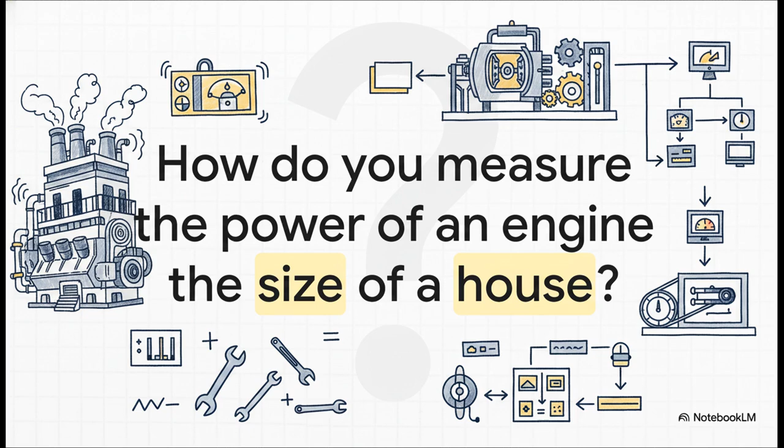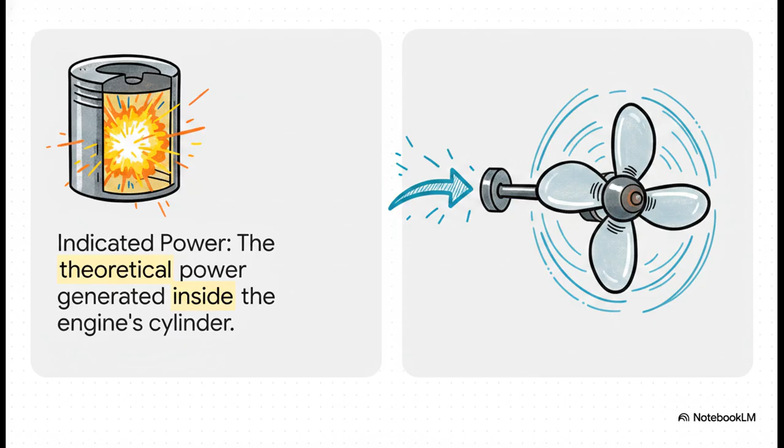Okay, the first thing you have to understand is that an engine's power isn't just one single number. There are two. You've got the theoretical power, the raw energy created by that explosive combustion inside the cylinder. We call that indicated power. But then you've got the actual usable power that makes it all the way to the propeller after fighting against all kinds of friction, and that's the brake power. Our whole mission today is to figure out how to measure both.

So, first up, we have to find a way to peek inside the fiery heart of the engine itself, right into the cylinder where all that power is first born. And to do that, well, we're going to need a very special tool. This right here is the engine indicator.

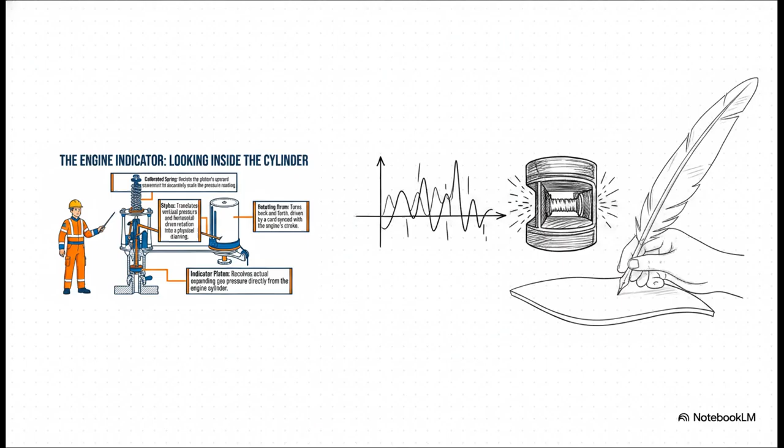I want you to think of it like a mechanical artist. Its whole job is to reach inside that cylinder and literally draw a picture of the invisible, incredibly violent pressure changes that happen during a single power stroke. It's an amazing way of making the unseen seen. I mean, isn't this just incredible?

The mechanics are so beautifully simple. You have to remember, before we had all this advanced electronic equipment, how could you possibly know what was going on inside that explosion? Well, this was the answer.

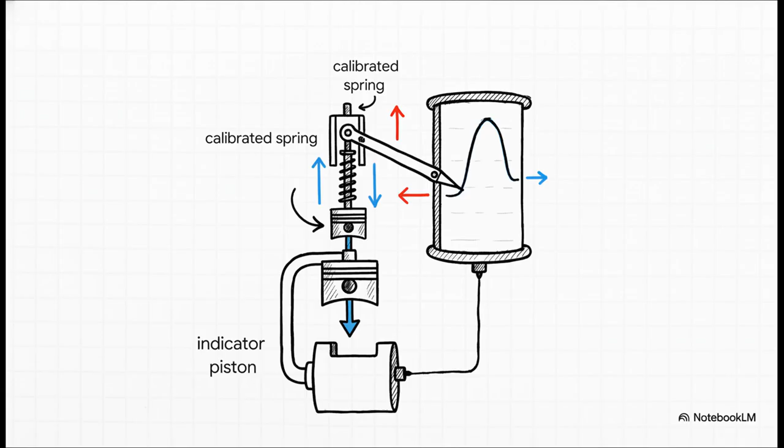A tiny piston feels that immense pressure, which pushes a carefully calibrated spring, which moves a little stylus up and down. At the same time, a drum covered in paper, which is physically linked to the engine's main piston, moves back and forth. What you get is a perfect physical map of pressure versus volume.

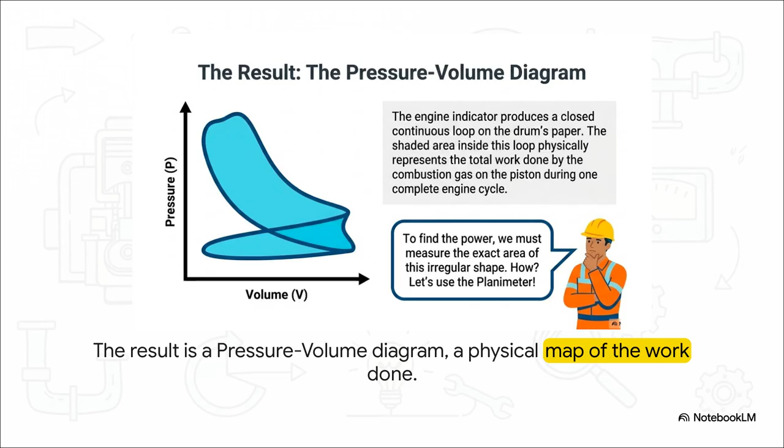And here it is, the final product. This loop, this kind of strange-looking shape, is what's known as a pressure-volume diagram. And it's not just some random squiggle. The actual physical area inside that line represents the total amount of work done by the gases on the piston during one cycle. So the bigger the area, the more work and the more power.

Which, of course, brings us to our next big engineering challenge. We have this beautiful drawing of the engine's work, but it's a totally irregular shape. You can't just use a simple formula like length times width. So how in the world do you turn this drawing into a hard number?

For that, you guessed it, we need another incredibly clever mechanical device. It's a tool that was designed specifically for this exact problem, and it's almost like magic in how simple it is. So say hello to the polar planimeter.

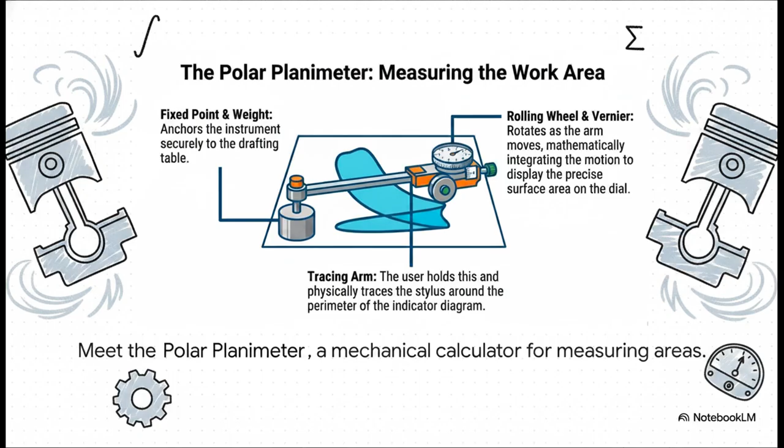This thing is basically an analog computer from a time way before digital calculators. It was designed for one specific beautiful purpose, to precisely measure the area of any two-dimensional shape you can trace with it. An engineer would just carefully trace the stylus of the planimeter all the way around the outside of that pressure volume diagram. And as they do it, that little wheel on the device, it rotates and it slides, and a super precise dial gives a numerical reading of the area. It's just pure mechanical genius, turning a physical shape into a real quantitative value.

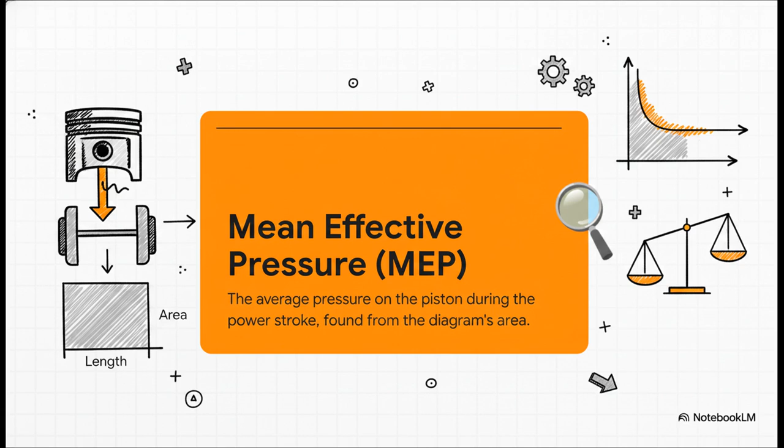So why do we need that area number so badly? Well, it's all about finding this absolutely crucial value, the mean effective pressure, or MEP. By taking the area we just measured and dividing it by the length of the diagram, we can figure out the average effective pressure that was pushing down on that piston during its power stroke. It's a way of taking that whole complex pressure curve and just simplifying it into a single, really useful average. And that MEP value, well, that is the golden ticket.

Once you have it, you can plug it into a formula with the engine's dimensions and its speed to calculate the total theoretical power being produced inside those cylinders. We have now officially measured the indicated power.

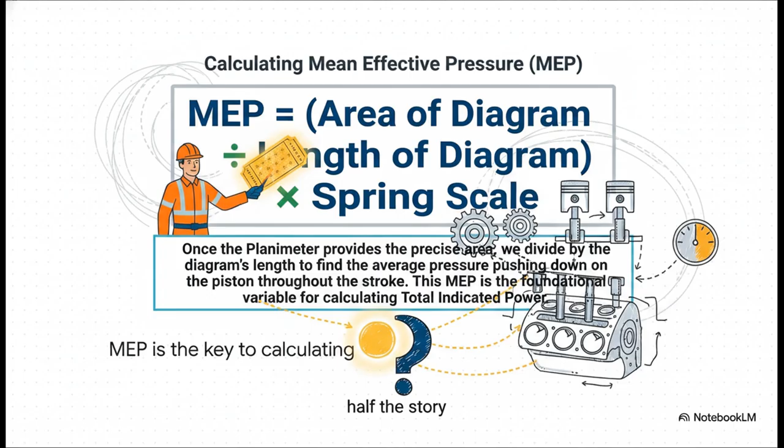But remember, that's only half the story. Now we have to leave the inside of the engine and head to the outside, to that massive output shaft, to find out how much of that power actually survives the journey to get there. See, the indicated power is the raw energy born from combustion. But on its way out, that energy has to move heavy pistons, turn a gigantic crankshaft, run pumps, all sorts of things. Friction and what we call parasitic loads just eat away at the total power.

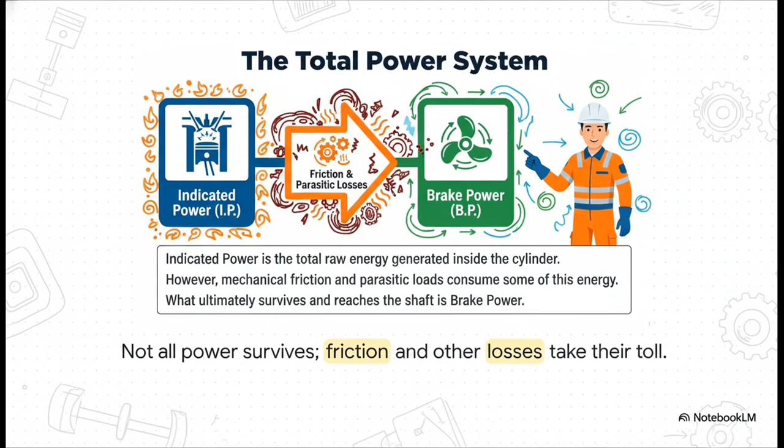And every little bit of that lost power is wasted fuel, which means wasted money and extra emissions. What's left over at the very end? That's the brake power. So how do we measure what's actually left?

With this absolute beast, the dynamometer. You can think of it as a huge, programmable, water-cooled brake that gets hooked right up to the engine's shaft. Its job is to apply a very precise, measurable load to the engine. It's basically challenging it to an arm wrestling match so we can measure its real-world strength.

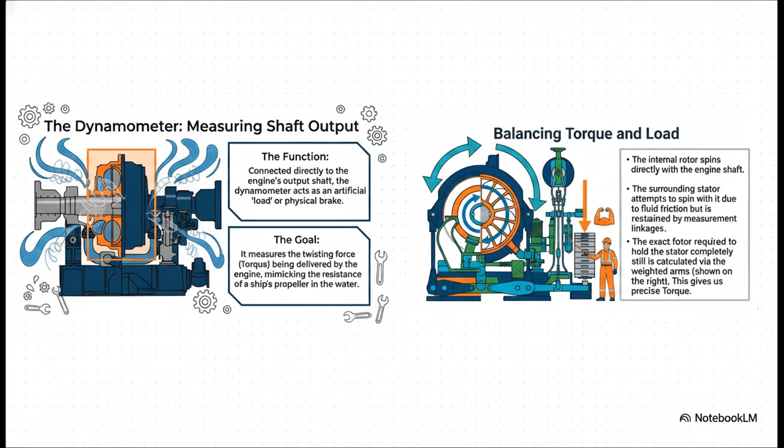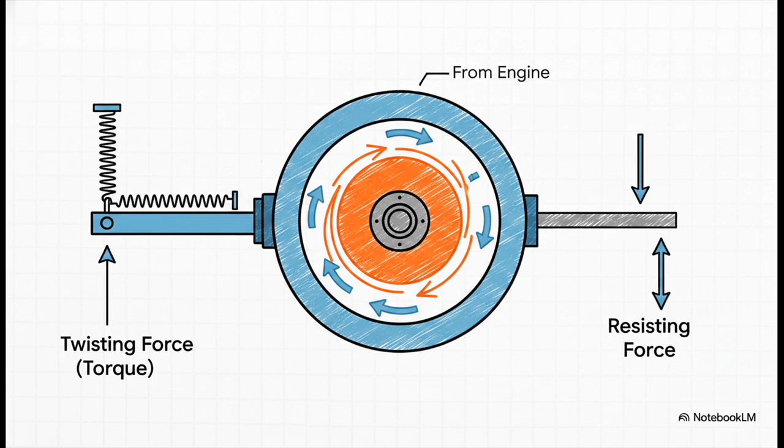So inside the dynamometer, the engine spins a rotor through a fluid. Now this tries to drag the outer casing, the stator, along for the ride. But that stator is held in place by a very precisely weighted arm. The exact amount of force it takes to keep that stator from moving gives us a perfect measurement of the engine's twisting force, its torque.

And once we have that torque value, the final step is actually pretty simple. We just combine that twisting force, the torque, with the rotational speed of the engine, its RPM, and with that we can calculate the brake power. This is it. This is the real deal, usable power that the engine actually delivers to do work.

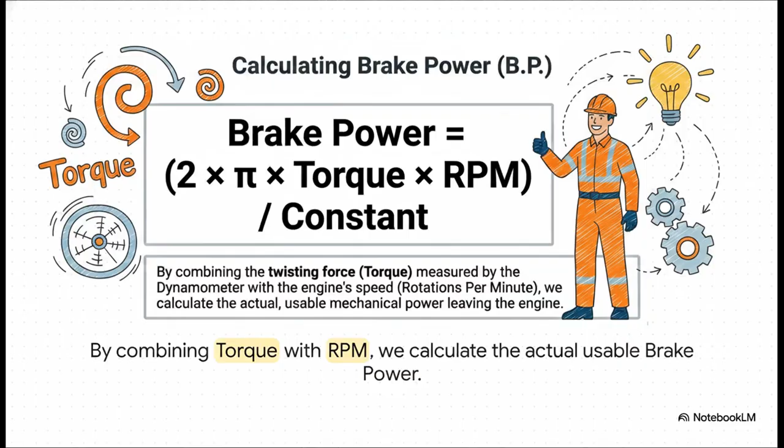Okay, so we've done it. We have measured the power that was born inside the cylinder, and we've measured the power that actually gets delivered at the end. Now it's time to put them together and give this engine its final grade.

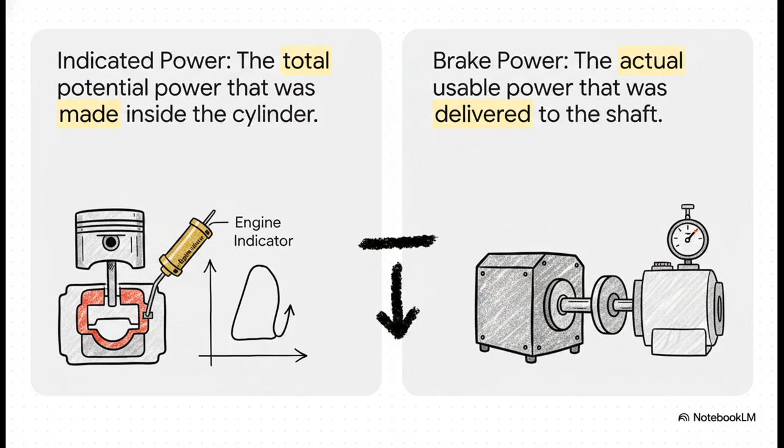So on one side, we've got the indicated power. That's the total theoretical output that we calculated from our pressure diagrams. And on the other side, we have the brake power, the actual delivered power measured by our dynamometer. The difference between these two numbers tells us everything about the engine's internal health and ultimately its profitability. For a big marine diesel engine, a typical number you might see when you compare the two is right around 85%.

But what does that percentage actually mean? It means that 85% of the power that was generated in the cylinders successfully made it all the way to the output shaft. That other 15%? It was lost to friction. This ratio, brake power divided by indicated power, is called mechanical efficiency. And for a marine engineer, this percentage is the engine's ultimate report card. In an industry where fuel is one of your biggest costs, even a tiny drop in this number can signal millions of dollars in losses, or catastrophic failure just over the horizon.

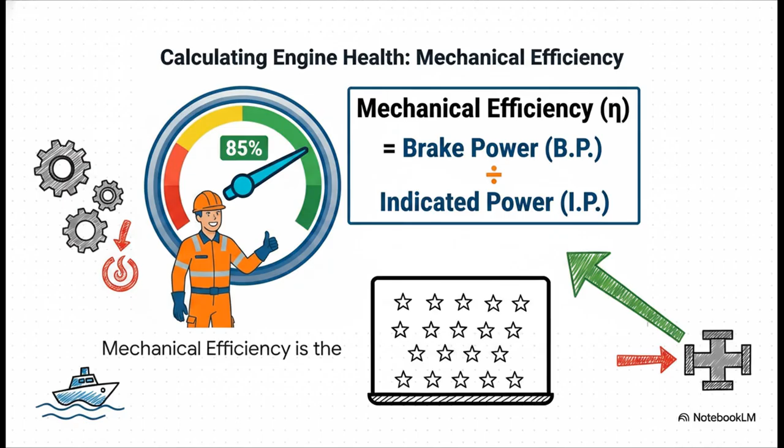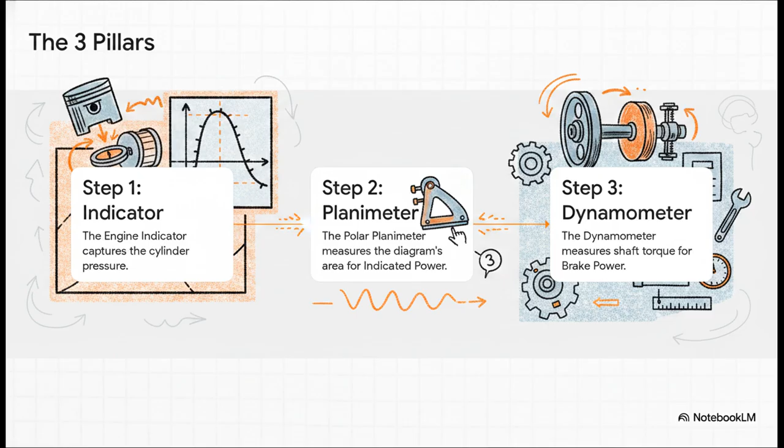So let's just quickly recap the 3 pillars of this whole process. It all started with the engine indicator, which drew that crucial pressure volume map for us. Then the amazing polar planimeter translated that map into a number, which let us calculate the theoretical indicated power. And finally, the dynamometer measured the real-world torque to give us the actual usable brake power.

And bringing all that together gives us that one key metric. Mechanical efficiency really is the whole story in a single number. It's the measure of how well this mountain of moving metal can turn a chemical explosion into the force that literally moves the world's goods across oceans.

Which really leaves us with a final thought. These century-old mechanical principles for measuring power are still fundamental today. They allow engineers to diagnose problems, to refine designs, and to push for every last fraction of a percentage point of performance. So the real question is, how close to a truly perfect, 100% efficient engine can this kind of precise measurement actually help us get?